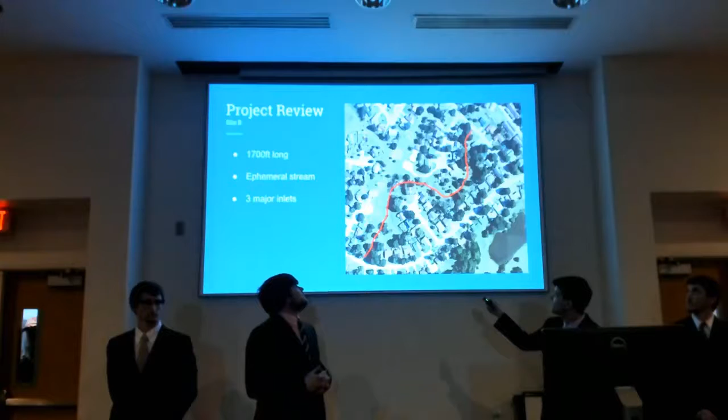Moving on to site B, from top to bottom, it's 1,700 feet long. As I just said, it's an ephemeral stream, and there's 3 major inlets to the stream. They come in from site C right here, they come through site A to here, and then this cul-de-sac also inlets into the ephemeral stream.

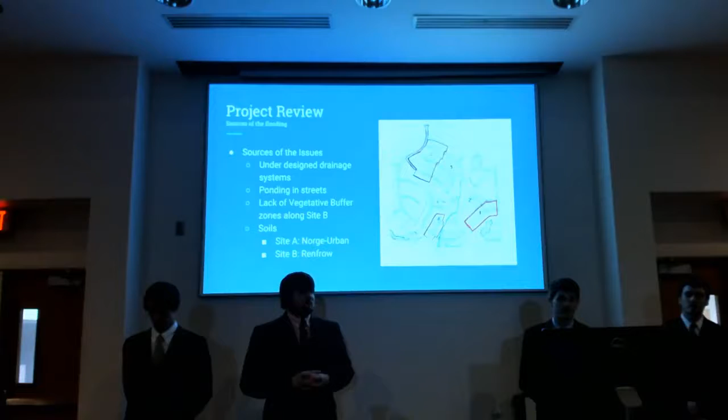And as far as for sources of the flooding, this is an image of the original site plan of Parkview Estates. It was designed in the early 70s. And as you can see from the quadrants, they designed this neighborhood in pieces. So as for problem Site C, it was made in zone 2, and it was designed for that type of drainage situation. And so everything that's been built above it over the last 50 years is going through that same drainage system, and that's why we're seeing a lot of flooding occur.

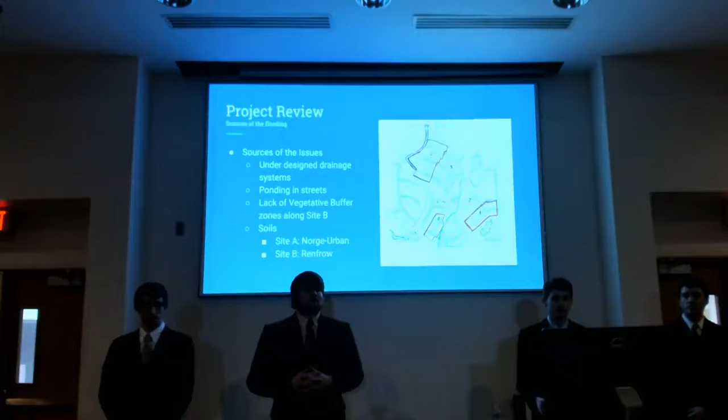There's also a problem in Site B. It's basically a barren stream. There's not really a lot of vegetative cover, which is why the sheet erosion is happening and the cutting at the problem Site B that you just saw. Also, the soil type of the neighborhood is a major concern. It's just mostly clay, and after soil testing, we waited for a couple hours and the levels didn't drop at all.

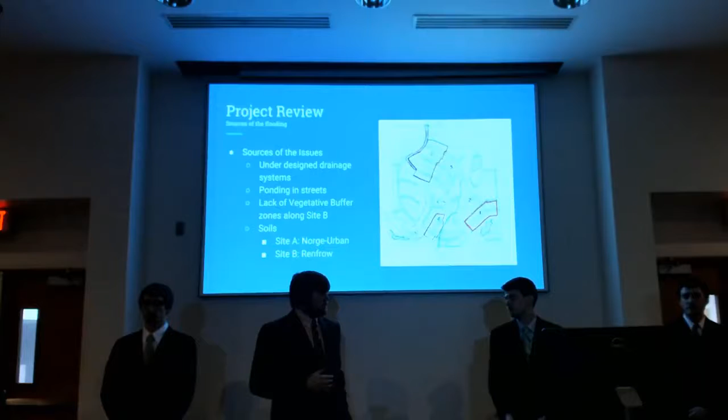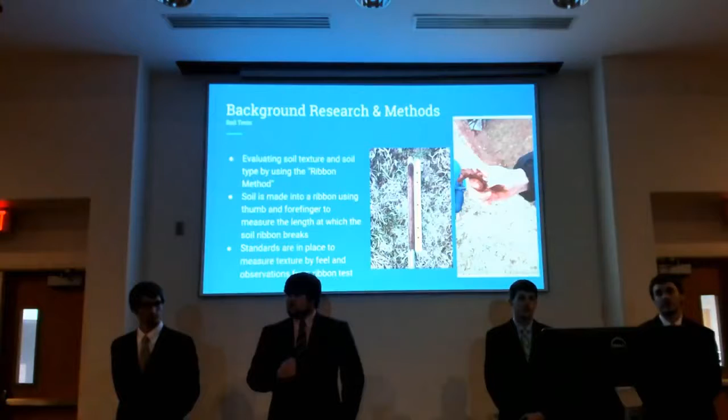When determining the soil, we used a ribbon method. This is a method by the NRCS, Natural Resource Conservation Service, formerly known as the Soil Conservation Service. This method is a touch and feel method where you take the soil and rub it in your fingers, as you can see on the right, until it makes a ribbon. And then once that ribbon breaks, you can measure it, and that will tell you a soil type. You do the feel by rubbing the soil in your hand, and the level of grittiness will give you a soil texture. These methods were used to determine the soil types and texture. As you can see in this last picture, we took a soil probe and we got almost a foot of clay at the topsoil.

Okay, so now we're going to start talking about what our final designs are for our project. And so we're going to start with problem Site A. Now there are two main problems at this location, the first of which being the ponding in the cul-de-sac area. And the main reason that we are seeing ponding in this particular cul-de-sac is the poorly sloped waterway that it is supposed to exit at. It's at a pretty bad slope, about 1.8%, and also the design of that particular water exit just is not able to handle very much water. The second problem we see at the site is erosion.

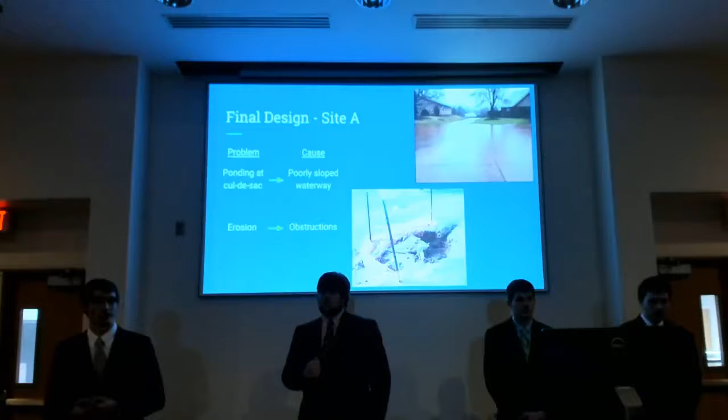Now, once the water does reach the end of the waterway, it travels down a greenbelt area until it enters the stream. Now, in the greenbelt area, there are several obstructions that are in the path of the water. And once the water reaches there, it just erodes around it. And you can see that picture of the stump. That's in the middle of the waterway. The water has just continued to make that deeper and wider. And so there's several of these sites located at Site A.

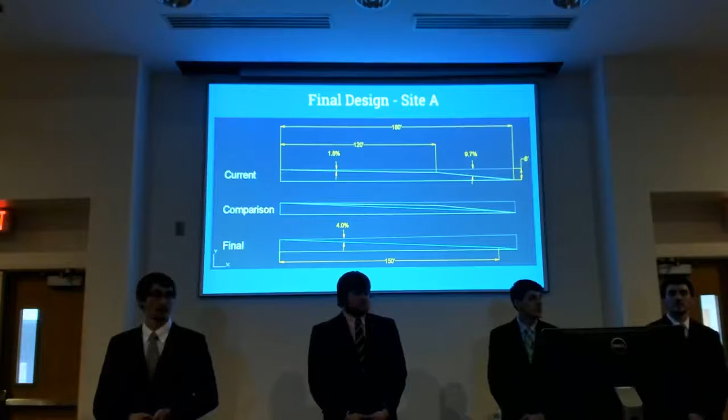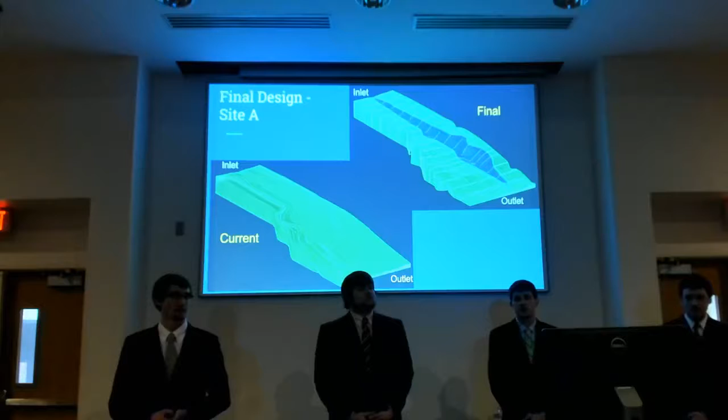These are images that we were able to develop using AutoCAD software. We took measurements from these sites and were able to input that data into AutoCAD. And so we took the current swale and we were able to use our designs and edit that in AutoCAD to make the final design of that swale that you see.

So a little bit about the mathematics and the hydrology behind this. We first had to determine our time of concentration of the sub-watershed, that purple area. The time of concentration is the amount of time it takes from the water at the very edge of that watershed to reach the exit point. There were a couple of assumptions we had to make when finding our time of concentration. And the first thing we had to consider is the fact that the path of the water is not a straight line. A lot of times the path of water is determined by the slope of the land.

So if you have just an open field or an area like that, many times the path of the water is linear. However, with Parkview Estates, the design of the stormwater system is through the streets. And so there's no underground piping system that the water is directed to. It's actually all on the surface. And so the houses and the yards and the driveway, it's designed to put all of the water into the street, and the street is the conveyance system.

And so we had to take the length of the furthest street to the outlet in order to get our time of concentration. And this was just one of the assumptions we had to make because it was an urbanized area. So once we found our time of concentration, we decided to go ahead and find our rainfall intensity for that area. Rainfall intensity is just the amount of water that comes down at a certain time rate. And so we based this intensity on a 100-year, 24-hour storm.

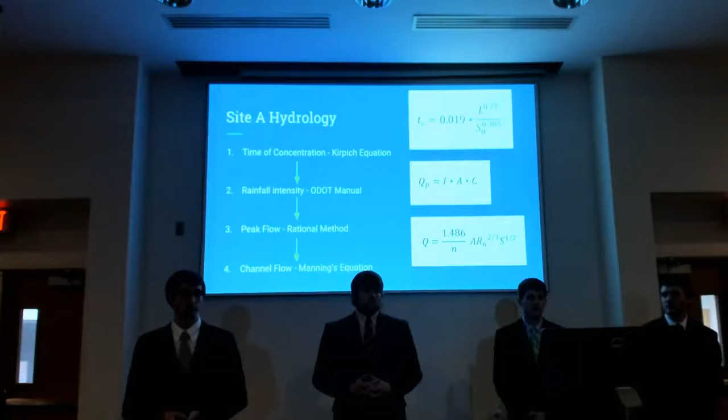So the peak flow we determined was about 35 cubic feet per second of water. As you can see, we multiplied our intensity, 10.5 inches per hour, by the area of the contributing watershed, 8.24 acres, and then that 0.4 is our runoff coefficient. That basically indicates that asphalt is the avenue of the water to get to the outlet point.

So yeah, it's hard to imagine 35 cubic feet of anything coming at you. So we were not really sure if our design would be able to handle that much water. You know, maybe we might have had to downgrade to a 50-year storm or a 25-year storm. So we applied Manning's equation to our swale, and we cut it up into 14 different cross sections. And so we applied Manning's equation at each cross section, we summed them and took the average.

And what we found is that if we take just the added swale that we want to put in, it will handle about 23.8 cubic feet per second of water. But the area around it, from house to house, including all the green space that it has to go to, that can handle 42.7 cubic feet per second of water. And so after these numbers, we were quite confident that, yeah, the swale is capable of handling a 100-year storm, given that condition.

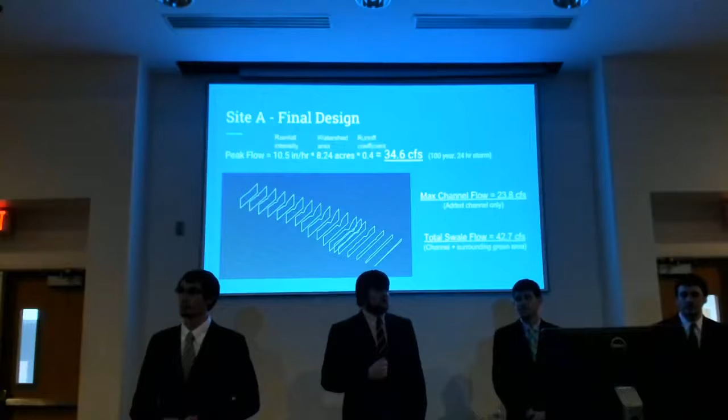Here's a top view of the current swale compared to the new swale. The swale that we want to be constructed in this area, we want it to be parabolic in shape and really very smooth with the existing condition of the swale. It'll be about 12 feet wide, roughly 150 feet long at a 4% slope. After construction is completed, there will be about 6,000 cubic feet of soil removed from that site. And then there will be about 350 square feet of sod cover to place after that.

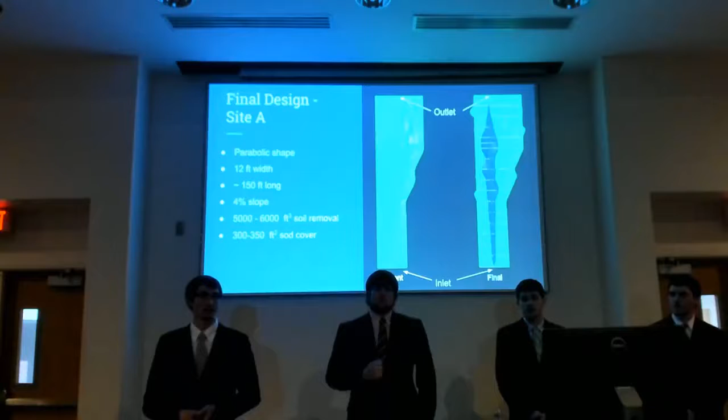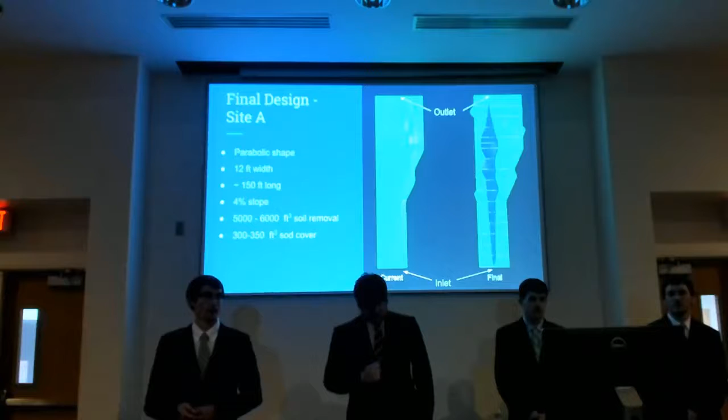The sod cover is extremely important because we really need to establish vegetation at this site in order for it to be successful. If there's no healthy vegetation, it will erode just like any other site. And this will also help to slow the water velocity as well if there's healthy Bermuda sod growing there at a fairly decent height. Here's another image of the swale.

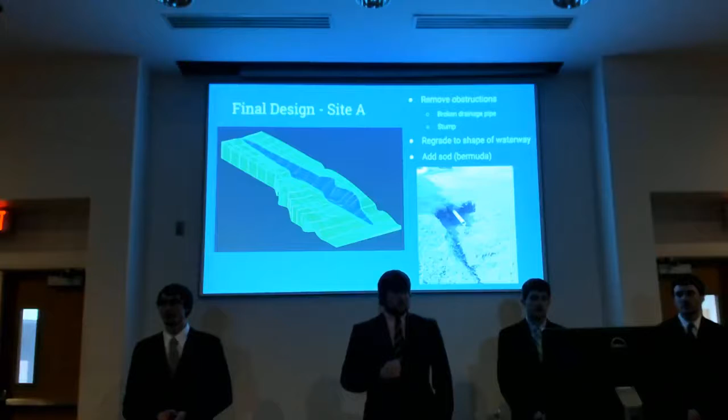And as far as the greenbelt area goes, all of the obstructions that are in the waterway must be removed. That pipe must be removed, the stump and the other rocks in that area have to be taken away and regraded to the shape of the swale that's surrounding that area. So after the regrading, again, we need to put Bermuda sod down at those sites and allow the vegetation to grow. And so after all these changes have been made, we're pretty confident that this area won't be experiencing ponding in the cul-de-sac or erosion along the greenbelt area.

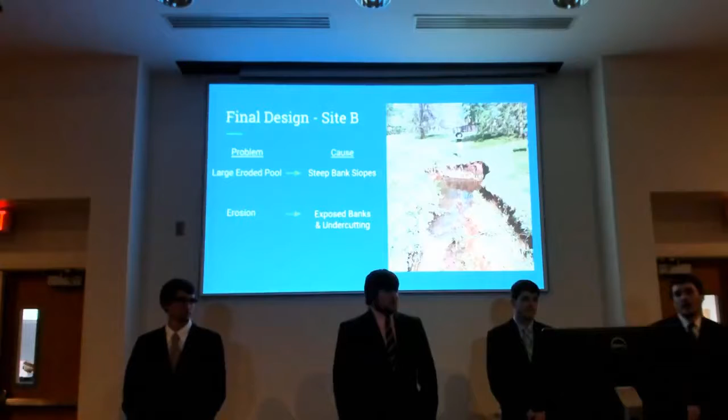Okay, moving on to the final design, Site B. This is one of our high priority sites, one of the ones that we've mainly been focusing on. As you can see, there's severe erosion on both the left and right side of the banks. This is caused by large volumes of stormwater coming into the stream, hitting these bare banks that have no vegetation on them and eroding the soil.

What this site is experiencing is severe head cutting and undercutting, and this is the term that's used when erosion is affecting the bottom of the bank, and you're getting almost like a big U shape, and then the tops will start to fall. So far, since we started in August, this site has increased probably about 2-3 feet in width. The erosion is getting worse and worse.

The pool there is about 6.5 feet deep, and the width of the hole right now is 13 feet wide. So the location of this site is kind of southeast of North Williamsport. This is a little out of the way. There are other sections that are definitely more noticeable in the Greenbelt area, but this design can be applied to those as well.

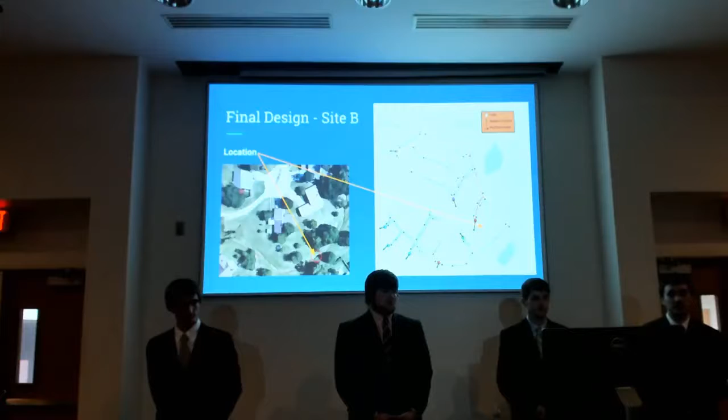Some hydraulic facts about the site. Since it was a stream, we were able to use StreamStats and get a mean annual precipitation of around 37 inches per year. The drainage area is over 100 acres, draining all into this stream when it rains. The average daily flow is very low, and that's because the stream is ephemeral and it only fills up when it rains. And so after it stops raining, the flow is down to a trickle.

The way we approach this problem, since it is ephemeral, is to look at it as a gully more than a flowing stream. Some simple design went into this as we would measure the depths of the stream and the heights of the banks and take 2/3 of that value and then go horizontally outwards, and that's when you would begin to excavate the banks and make them into a more stable 45-degree slope. This will make a more healthy system for the stream and will allow vegetation to take hold.

After the banks have been graded, Bermuda sod will be planted to help with erosion, and the big thing is the water that is standing there. Like I said, this pool is really deep. It all needs to be drained and filled with soil, compacted, and then covered with riprap. Now, riprap are large stones that are put in place along the banks, along the stream bed, that help to reduce erosion.

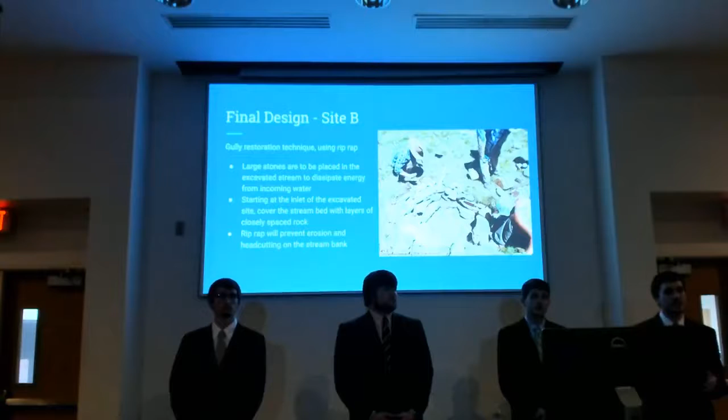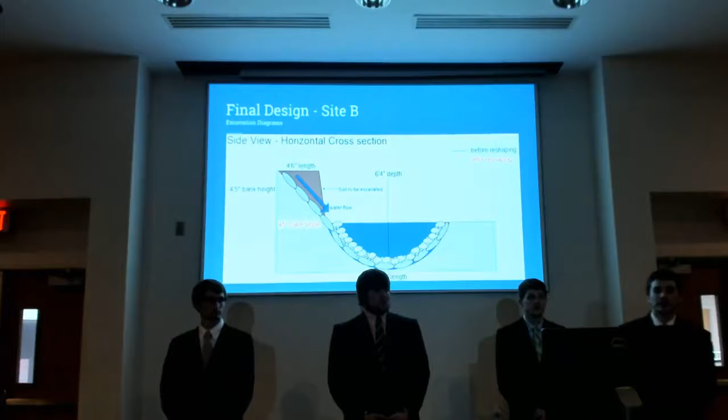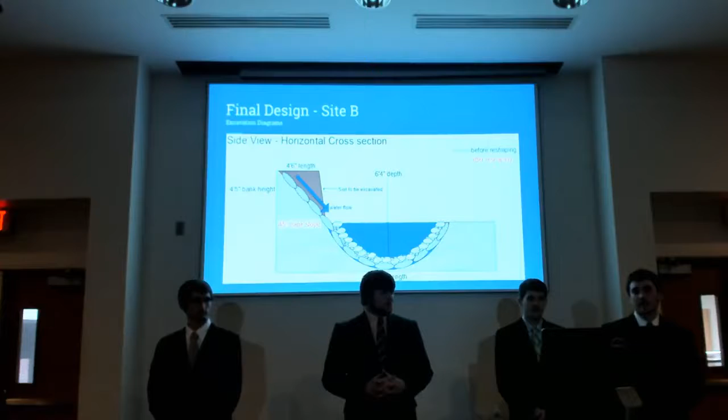Here is another one to help you picture it. The water will be flowing this way and leaving this way. This is a horizontal cross section. You can see, again, the soil will be excavated to make a 45-degree bank slope, and then the riprap will be added along that inlet. So when the stormwater comes in, it'll hit that riprap and dissipate the energy, reducing erosion.

Here is what the aerial photo will look like. Starting on the left side, working our way right, you will see the green area. That is the Bermuda grass that is to be added on the 45-degree slopes. We have smaller stones working our way through the middle toward the larger stones. And this whole place will be lined with riprap after excavation. And you can see how wide it is now. It will be wider afterwards, but it will be a stable and healthy environment.

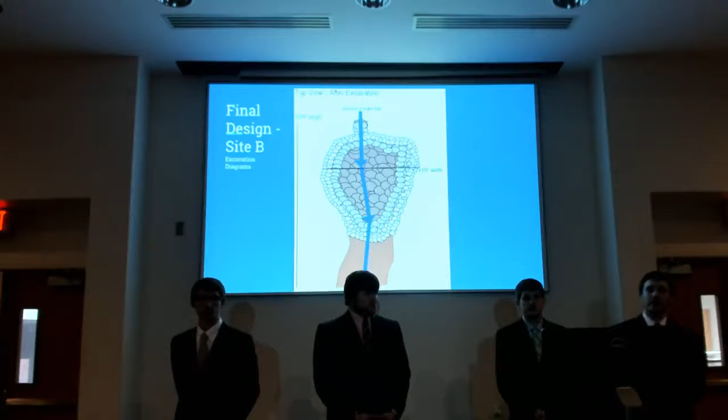So this is where it comes down to cost. For the entire project, both site A and B, we're looking at around $6,500 to $7,100. After contacting previous excavation companies, we were informed that the site is very small and that they wouldn't consider working on this. They referred landscapers. So we took it upon ourselves to just go ahead and do some of the landscaping calculations.

Using local price estimates from, say, Kinnunen Rental, $600 per week for a skid steer and trailer. Now you're looking probably a little over a week's worth of work with a landscaping company. That'd probably be about $4,400 to $5,000. The turf for 450 square feet, this would be to cover Site A and Site B, around $1,000. The riprap just for Site B would be around $500.

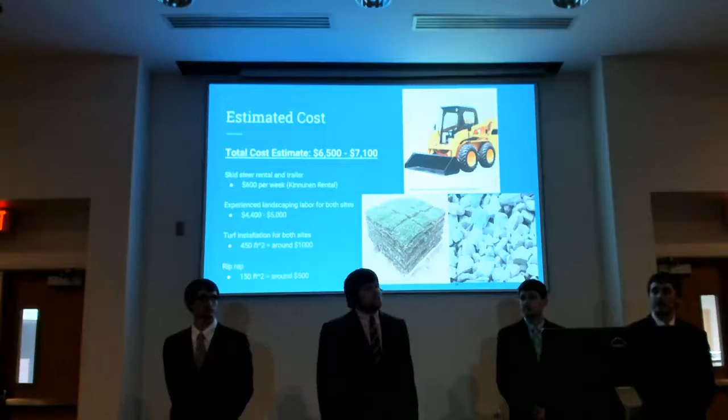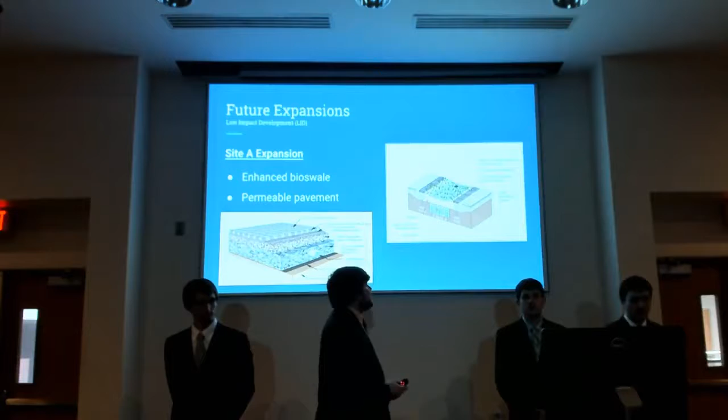All right, and then talking about some of those future expansions that could be added to some of these sites. We still would really like to see some LID implemented in this area. The main issue is the soils are so full of clay that the water can't really infiltrate very well. So any LID we implemented would have to be enhanced. So starting here with our enhanced bioswale, we could add this to the current swale that's already there.

We would just have to go through and take out a layer of topsoil and replace that with a more permeable soil, such as a sand, some asphalt aggregate included possibly in that area to help infiltrate the water, so we're not pushing as much water straight through that area and getting some of it down into the soil and reducing the surface runoff, as well as permeable pavement.

We're in a neighborhood, so obviously there's going to be a ton of concrete in the area. All of that being an impermeable surface, you're just pushing all of that water to the green space. Permeable pavement could be a very great application in helping to reduce the surface runoff as well, allowing the water to infiltrate into potentially, like in this diagram, an under drain where it didn't have to run across the surface and cause as much erosion.

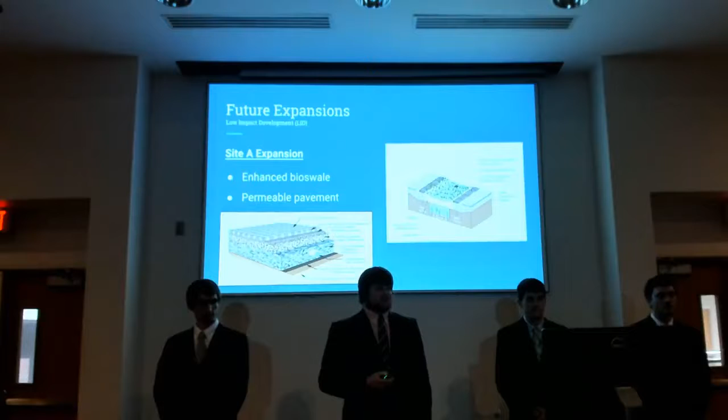It'd be a great place to slow the water down, allow it to infiltrate. This would also improve the water quality reaching the stream, helping to clean out the contaminants from the soil before it gets to the water.

In the time that we've been out there, we have noticed a very concerted effort from the homeowners in leaving a no-mow zone on either side of the banks of the stream, and we'd like to see that continue. The riparian zone really helps hold in the banks and slow down the water before it gets to the stream. It has to go through taller grass with longer roots before it can tear up the soils around there. So that riparian zone is very important in helping keep the stream together.